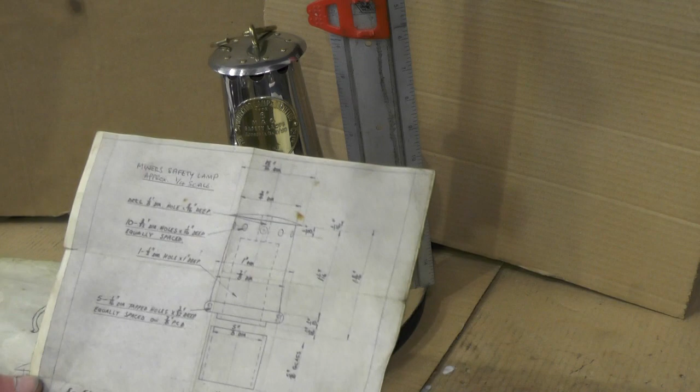So yeah, I'll come on to drawings then. When I opened the box, it had got all the original drawings in that we used to work to. Now they're a little bit faded, so I'm going to show you them, and then when I've done my video, I'm going to take a close up and just scan down them so you can zoom into various parts. So this is the half scale one, which is the one I did.

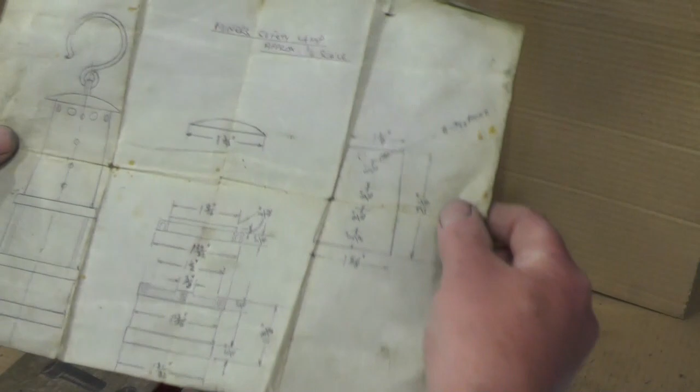So the full scale is 10 inches tall, and this one's roughly half size. So I'll try and get a full shot of this drawing in, and like I said, I'll do a more close up of it to follow on.

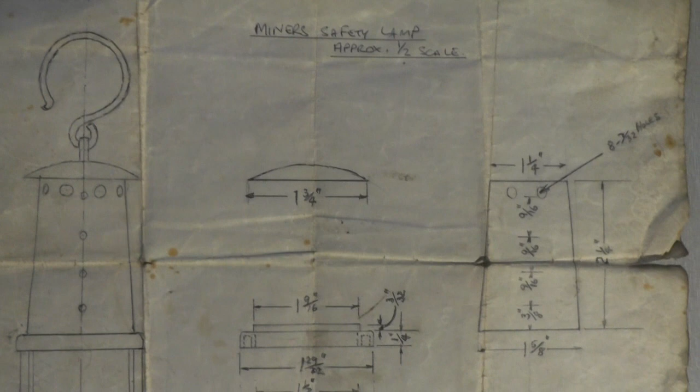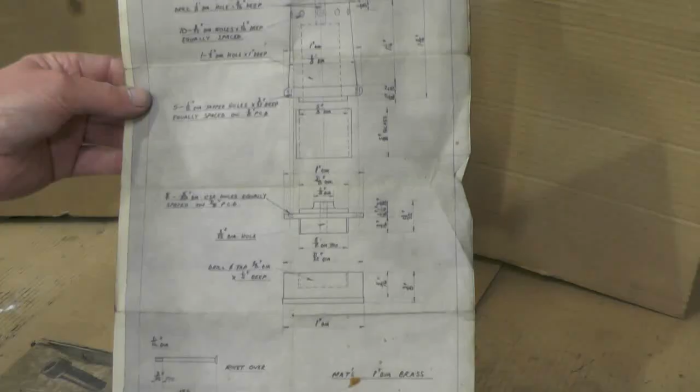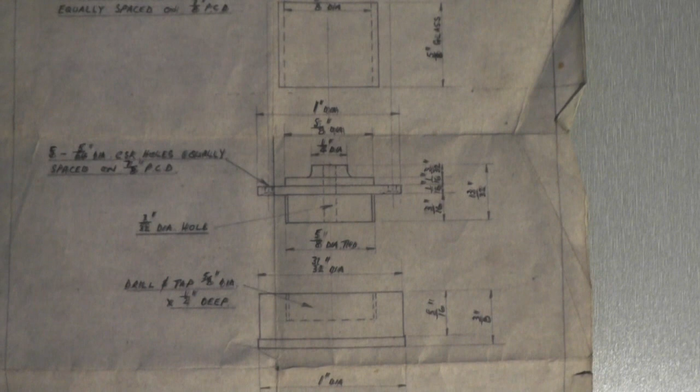And this one here is the quarter scale, which is these smaller ones. Obviously they've not got the glass in yet. Right, that's the drawings covered then. And what else can I say?

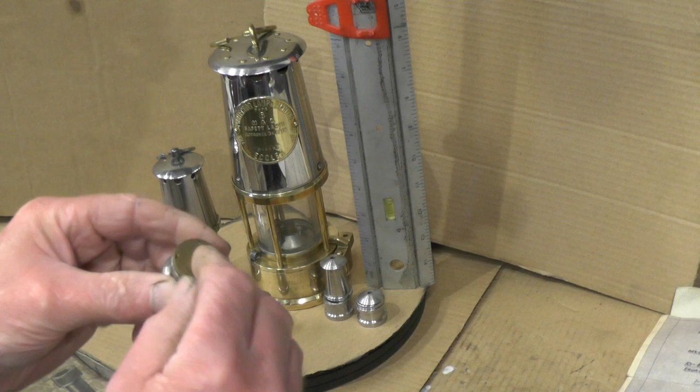Yeah, in this box it had even got one of the little brass handles that's partly finished for them small scale ones. And also it had the jig for doing the drilling for these pillars to make sure that they all line up in both pieces. A little brass jig. So that would fit onto the base, drill your holes, and then you'd fit it onto this collar above the glass, and then drill your holes to get a matching set of holes.

Now then, the glass. In this version I did, the half scale, what we used to use were fluorescent tubes. We used to cut them down on a diamond wheel to length, and they were just a nice fit in that diameter there inside. Mine broke a few years back and I've never found time to replace it.

Now the smaller scale, I've not actually made one of them myself, but I'm sure with a bit of research you could find a bit of glass tubing or clear plastic tubing to replicate the glass in that smaller one. With a bit of research I'm sure you could do that. Maybe if you're at a loose end with this lockdown that we're in, you might find time and might enjoy making one of them.